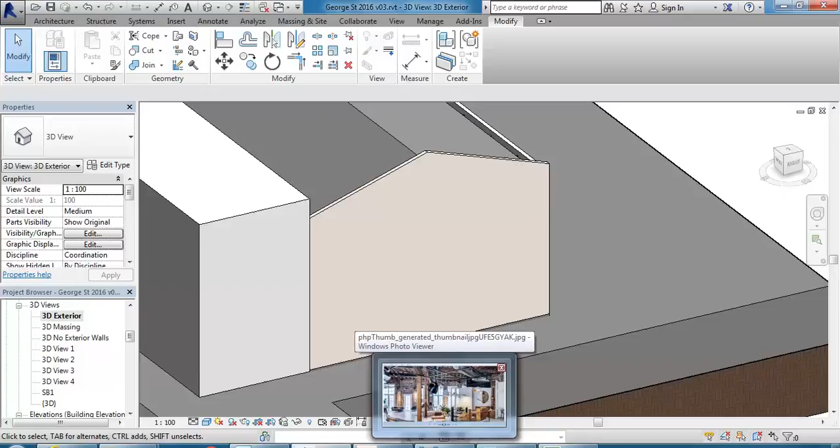So we're going to have a look at the facade, and it'd be a good way of checking the heights because I've done a bit of working out now based on the counting of bricks. So I'll just show you the method I used. I'm not going to give you all the numbers I've worked out because you should definitely sit down and work these out, and probably also go and do a site visit to take some of your own measurements. But just to show you the basic approach I've used.

I worked out that on this facade, just using street view, you should fairly easily be able to count the bricks at different points along that elevation. And then projecting around the front from there, you can see here that the line at the top of that wall... oops, I've gone a bit too close there.

Oops. Oh, it's gone and picked up one of those automatic photos, that's really annoying. So I just want to get off that.

Okay, so there we are. So again, projecting around from the top of that wall to the facade, you can see that the line there continues across to our building. And so by counting the bricks, you can easily work out the height to the wall moulding there, I suppose it is. Should know the name of that, but I can't think of it.

And then you can also double check and count bricks along the column there to maybe get an idea. That should be pretty close to the floor level on level 1 there. And again, you can double check to count bricks to the top there. And then also you can count bricks here from this line, which you've hopefully projected around from the side to get to the bottom there. And you can then scale to get the height from the cornice up to the top of the parapet.

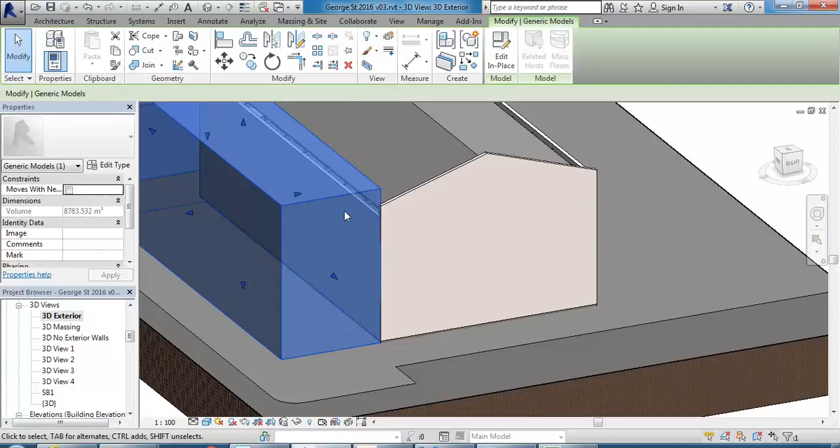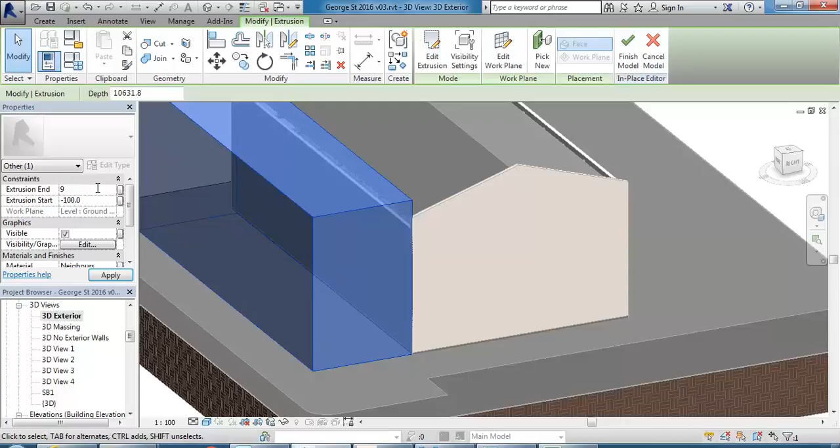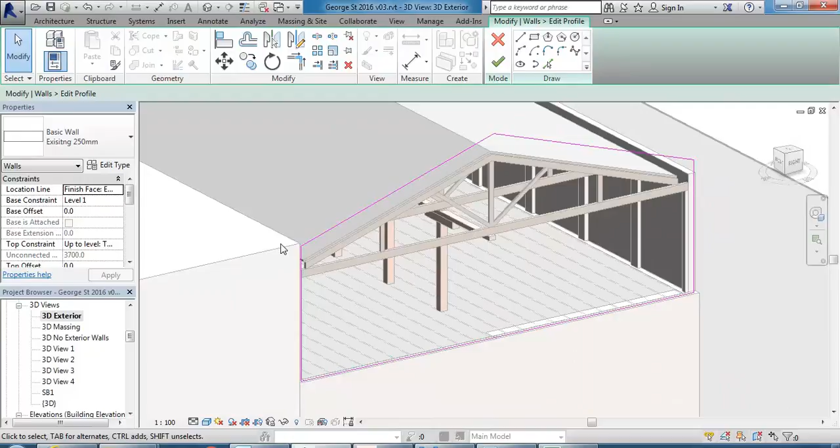Okay, so then to change the facade there, that facade wall, it's fairly easy to just select it again, go to Edit Profile, and you can draw a straight line coming across. So, yeah, that should be about right.

So I'm going to draw a line here, which should be able to snap to the corner of that neighbouring building. It won't be on the corner when it snaps to it because the plane that I'm drawing in is behind that corner. So you should expect that, and that's actually a helpful thing to be able to snap to the front there, but have it project onto the plane that I'm drawing on.

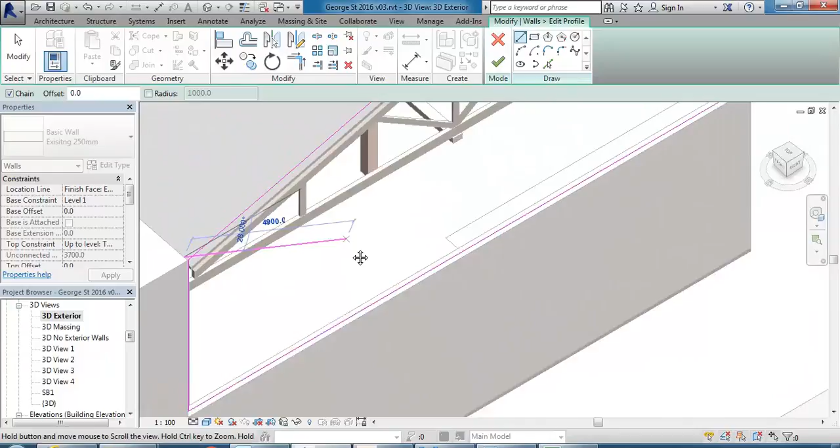So if you're not sure what I mean there, you can see from the side, the plane I'm drawing in on is the pink lines, and they are just behind that corner there. So it's projected back onto the plane that I want, which is exactly what I need.

And so then I can come across to the right and then use trim to join those lines together. And so then we can see that the stepping here is a little bit more, well, a little bit less than what I've drawn.

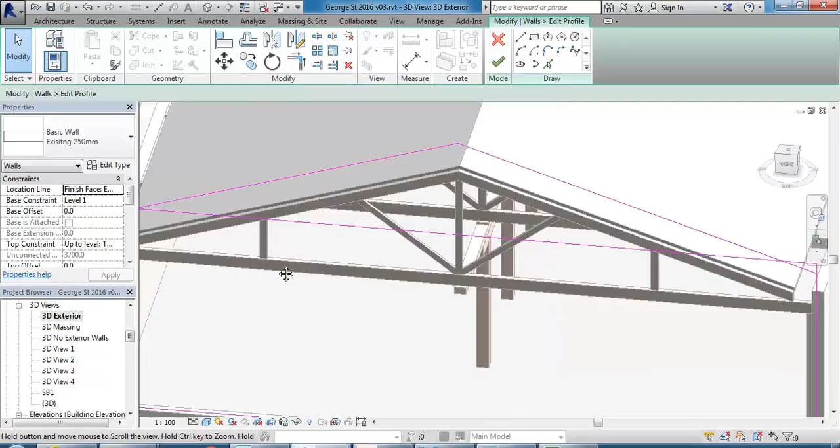Oh, so let's start it up again. So if I maybe just leave that angled for now. I could select those two lines and then maybe just for now do something like use the arrow keys to move that down to see how that could work potentially with the roof that's behind, because it does obviously need to conceal that roof.

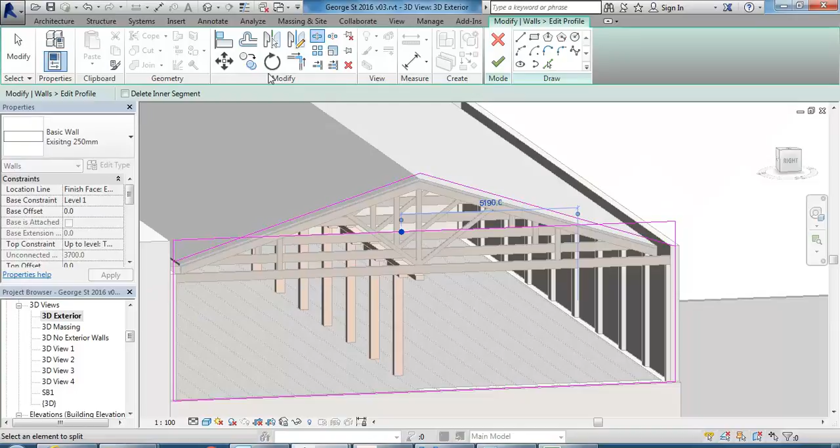And then I'll come back and modify this further once I've done a few other things on the facade. That's just to remind you how you can modify the profile of the wall at any time.

You could think about locking or associating that angled line with the roof. In this case though, we know it's not going to be an angle in the end anyway, it's going to be stepping, so it's probably overkill to go that far because it's all going to change in any case.

Before I can work that parapet out properly, I need to put in the other elements in the facade. So we've got a few important things: we've got those columns or piers, and then we've got the moulding that follows those, and then the windows and doors.

Going back into the plan view, the AutoCAD file doesn't show us where the columns are, and so we'll need to work that out.

Fairly straightforward though. I've got the wall tool here. Actually I'm just going to select the walls that I've already done and fix those first, because you'll see if I select the walls that the one on the side is going all the way to the corner and the one on the facade isn't.

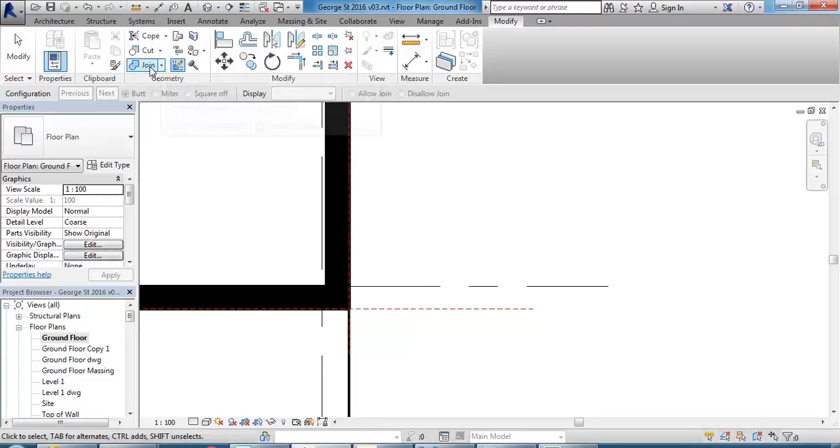So on the modify tab, hopefully you're getting used to using that one. Wall joins, next to join, and I'm going to click onto the corner there and use the next option, which is hard to see in this view because it's got the coarse display set to grey, so I'll go to a different view where hopefully I can see, again using the wall joins tool.

I already know because I've selected, but just to show you again, if I select that now, then when I choose next, you can see it's a bit tricky because there is a line right underneath the line I'm looking at, but hopefully you can see that line switching from here to here.

So we've looked at this already, but I just want to go over this again. This wall, again we've got the same issue, and again using the next option should make it go through to the end, and this one now stops at that line.

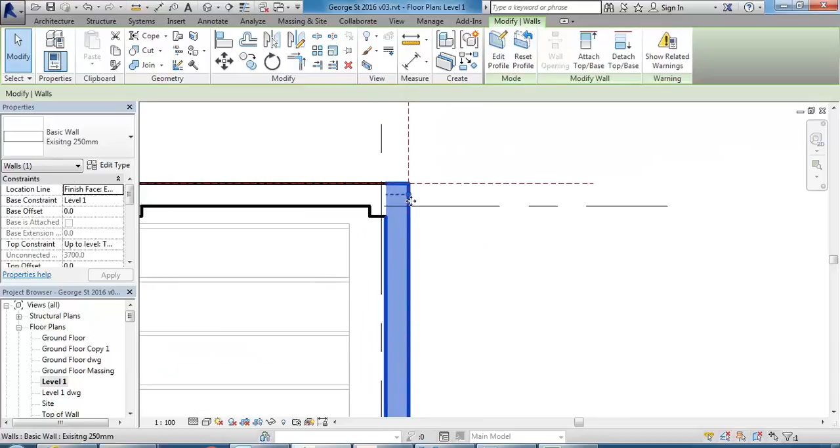On level 1, it's even more important, but this is the one I showed you before, so that's done already. There you can see that wall continues all the way to the front, and there again.

So the reason I've checked that on the ground floor now is because when I do the next set of walls, or the piers, I want to make sure they join correctly. So back to ground floor, I'll go to the one with the drawing file showing, just to make it a little bit easier.

And then having a look at these images, these are things you'll get used to in no time at all. When you see this with 1.5 bricks, then you know that it's 230 for a single brick, and then of course 110 going the other way, plus 10 mil of mortar, so 450.

Is that right? Sorry, did I say 450? Sorry, is that right? 230... yes, 450, that's right, isn't it? I'm not going mad. Yep, 450, and then that should be the same on all of these.

Okay, so again the projection. Just looking back at that image, how far do you think it projects from the wall? If it's half a brick, you can assume usually it's half a brick that it's coming out. So do you think it's 110?

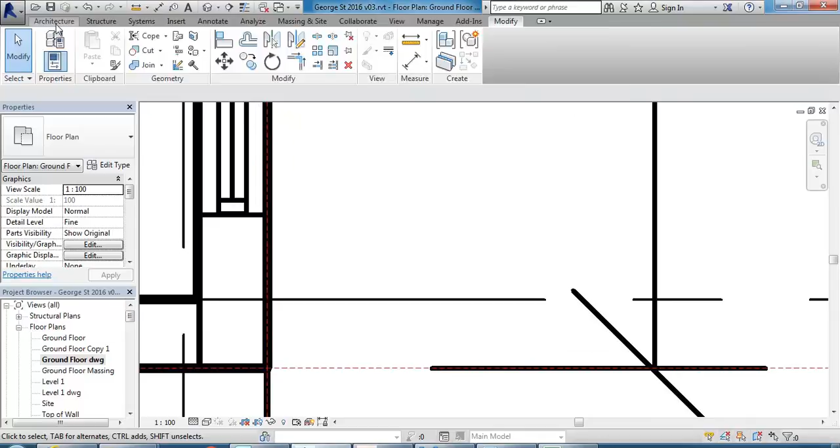Okay, so then with the wall tool, remember you've got the single brick wall type there, but that has face brickwork set as a material, and you probably don't want that. I've already made one that's existing 120, but make sure if you don't, that you make one that is going to be simpler than the face brick.

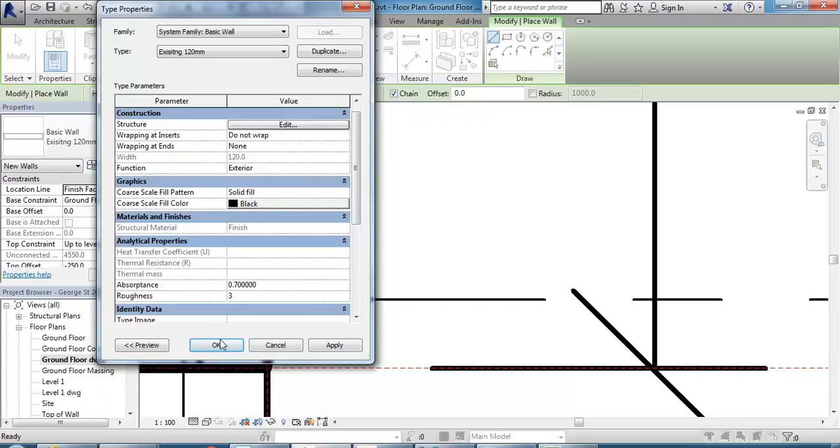It should be 120 anyway. And then also you want the material to be nice and simple. We don't want face brickwork to show here, and we don't want the brickwork to show in plan either. So with finish face interior as my location line, I'll set the height to go from ground floor all the way up to top of wall, I think.

And then going from this corner here, if necessary, you need to press space to flip it, and then we know it's 450.

Yeah, sorry, 350, not 450, you're right. So 350, we can just type in and then press enter.

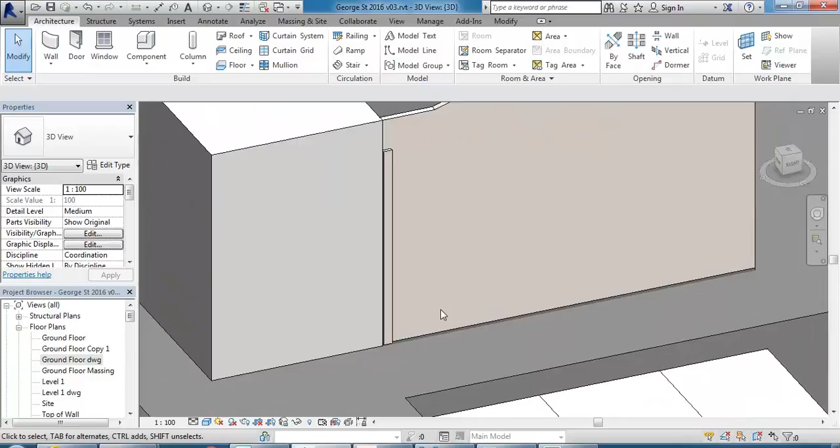Okay, so looking at the wall there, while I'm at it, I can fix this one and the one next to it, and just make the base offset minus 100.

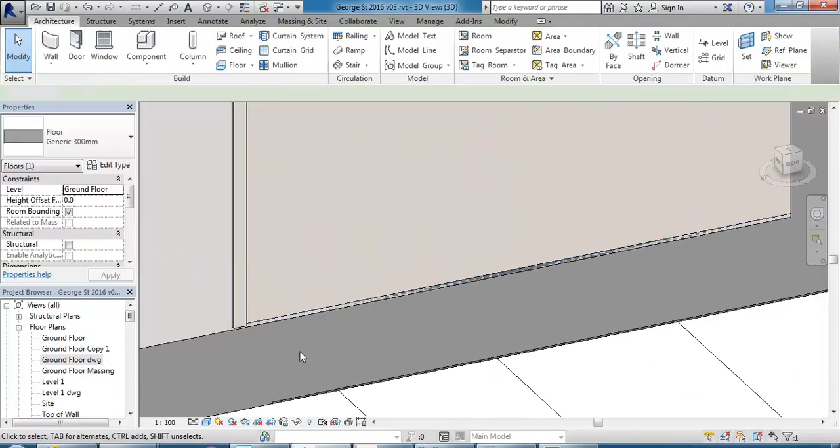For those to bring them down to street level. The floor I'll need to adjust as well, but actually if you have a look at it here, it's a bit of a funny facade, because there is a step here that's hard to see, and also a little one there.

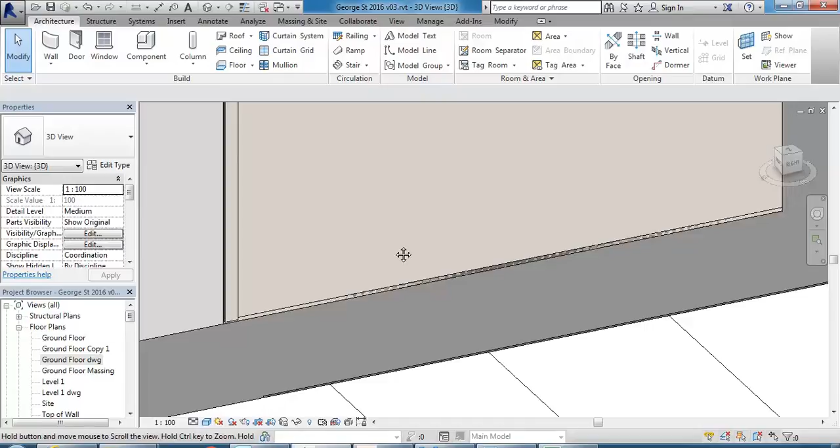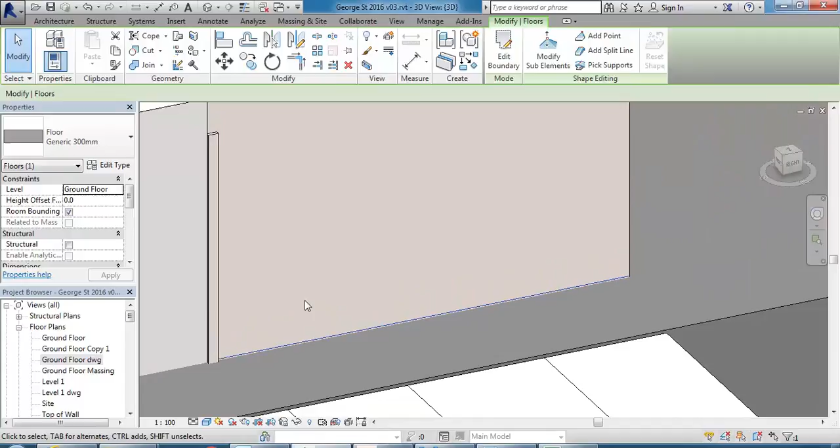Now, there's no reason I still can't have these walls going down minus 100, that's okay. They're just going down into the ground, I think that's a good thing. So then the base offset for this pier, again I can make that minus 100 to join up with the other walls. And then this floor edge that's coming through the wall, in the end that'll be refined once I do the opening. So you don't need to worry about that, but you should be thinking about it.

And then going to the next pier, again looking at the image there, that should be basically centered. And this is where I think the drawing could be wrong. I'd say it probably is, because that pier would most likely be centered in the middle of the two properties, or what there were two properties at one point, I think.

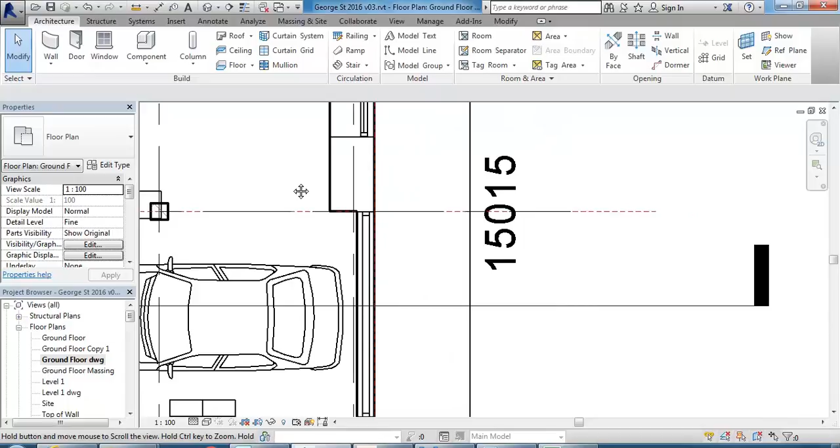So in the middle of those two different sides of the building, that should be pretty well centered, and they've got this opening here lining up with the centre line, which I think is probably wrong. So it's a good opportunity here to fix that.

So I'm going to select this pier and then copy that using the midpoint at the back, and then just snap that onto centre line here, and that should give you then a good reference to use when you put the opening in.

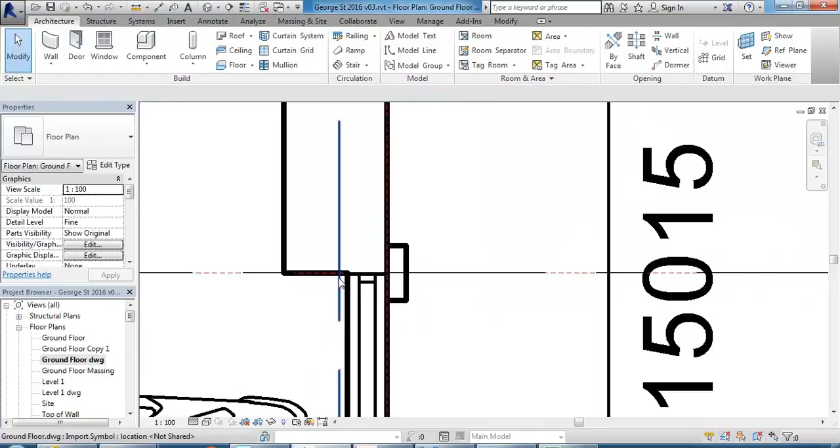Luckily we haven't done the opening yet, and it may be the case that this wall here extends. I might leave it like that for now, but it might extend down to the end of that pier.

And so then looking at the facade again, you've got a pier here that lines up with the parapet. So it's really important to get that as accurately as you can.

So 1, 2, 3, 4, 5, 6, 7, 8, 9, 10, 11, 13, 14, let's say 15 bricks across. So 15 times 240 - it's got 230 plus the mortar, so 3600.

Okay, so I'm just going to copy this, 3600 plus 350, so 3950. And there we go, that's turned out pretty well.

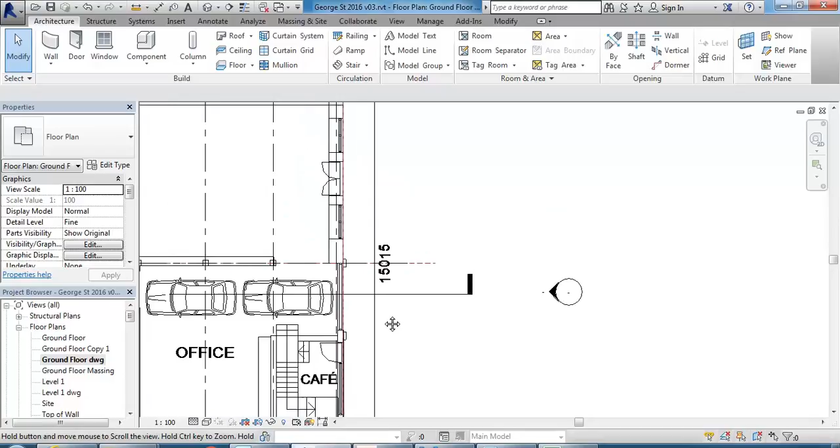And let's have a look at that. It may be, no, they're not quite even, are they, those two bays? Yeah, one's definitely bigger than the other. So that's probably the best we can do. But I mean, I don't think it's a coincidence that it lines up with the stairs there. So that looks pretty good.

And then going back to the facade now, it's a good opportunity to go over some of the modelling tools. And so you can see that the wall actually goes up to the parapet.

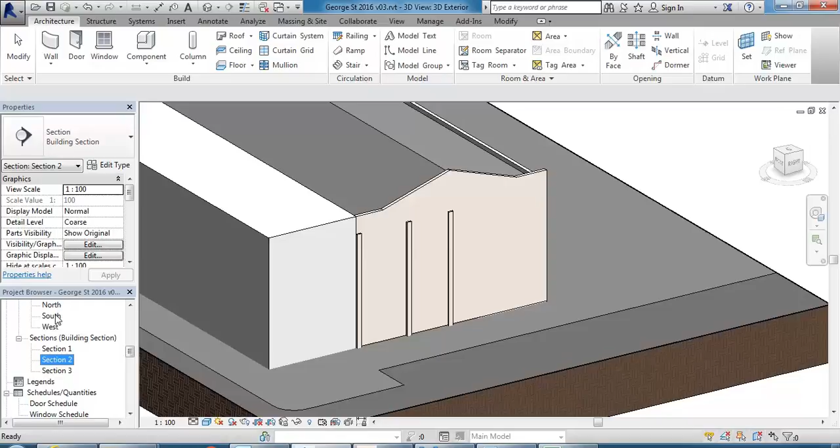So I might even make a level for that. I think it's worthwhile. So this in the east elevation can easily just be made by copying one of the levels. You don't need to use the level tool every time if you want to make a new level. It's actually a good shortcut.

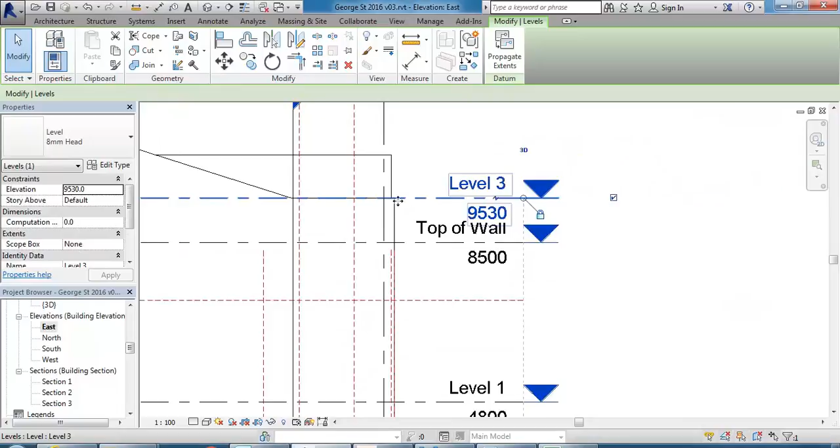To copy a level. I'm going to move that new level to the top of my parapet. Call it parapet. Oops, caps lock off.

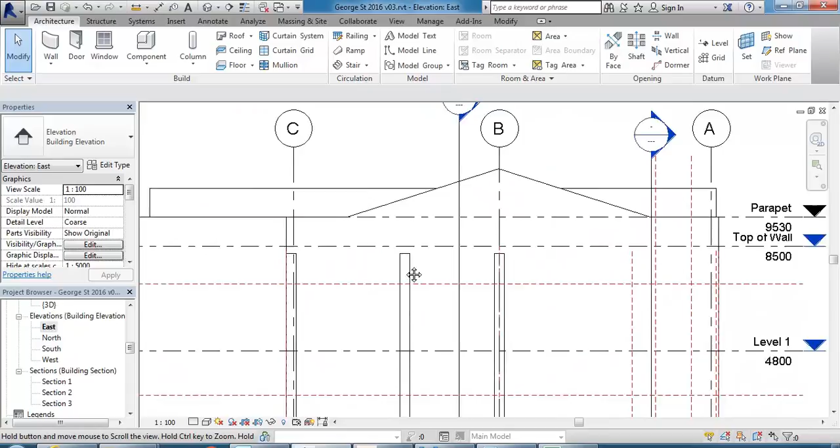And notice that it's got a black arrow, and that tells you that there's no plan associated with it, and I don't need one. So looking in the project browser here, there's no floor plan called parapet. You can easily make one later if you want to, but again, I don't need one.

So what I can do though is select those walls that I've created and then set their top constraint to that parapet level. And then looking at the heights there, they do finish a little bit below. So it's probably 2 brick courses down, I'd say.

So what's that, 170 roughly? I'm going to make sure that base, the top offset there is minus 170, maybe minus 180, actually it's probably a bit more than that.

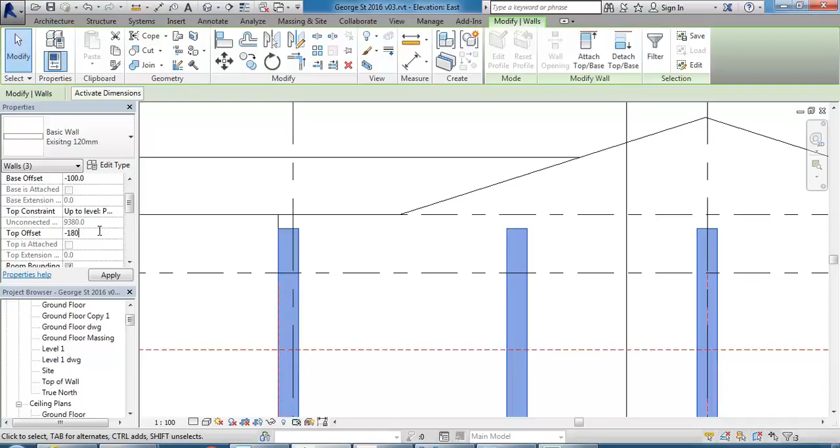And then I can start modelling the top there. Now I'm just going to get the other, there's one more pier, so using mirror, pick axis, I can pick my grid line. And what's the problem there?

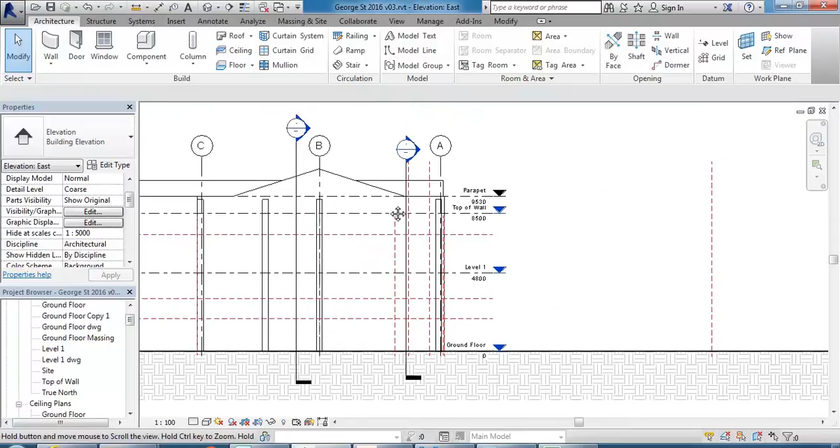Okay, so we've got an issue there with my set out, because I've gone from the centre of the wall. So I'm just going to dimension these.

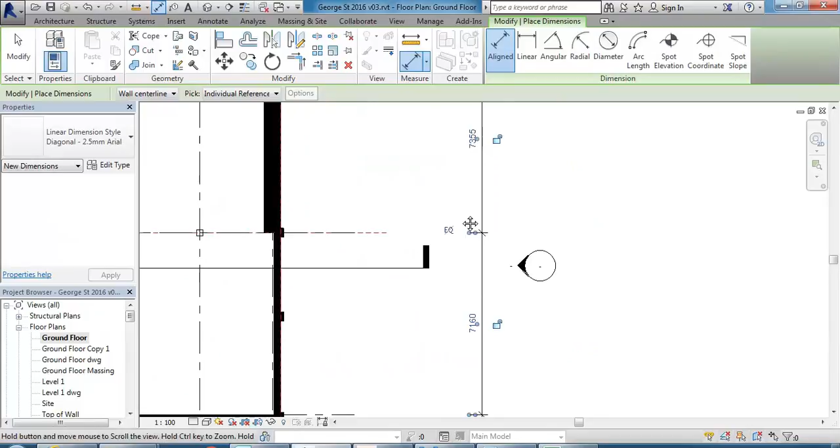So this has all come from the AutoCAD drawing, which might be accurate, but based on what I've seen so far, I'd say it probably isn't. So I'm going to make an executive decision there and just centre that grid line.

I don't know, has anyone worked out whether they are equal or not, the two sides? They probably are, because the roof structure you'd think would be symmetrical, and the columns would sit underneath the centre of that. So they probably are symmetrical, and I'd say the AutoCAD drawing is the thing that's off.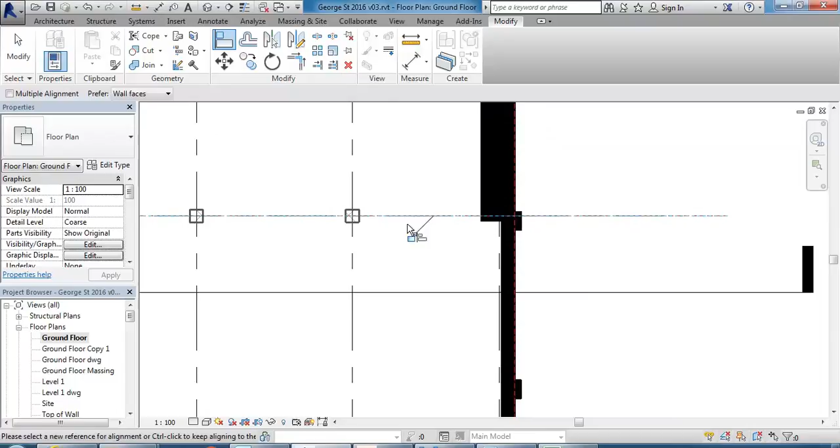Okay, so I'm moving everything across, and then that should mean that my pier as well should be even, but I'm just going to flip that over, also move that over manually.

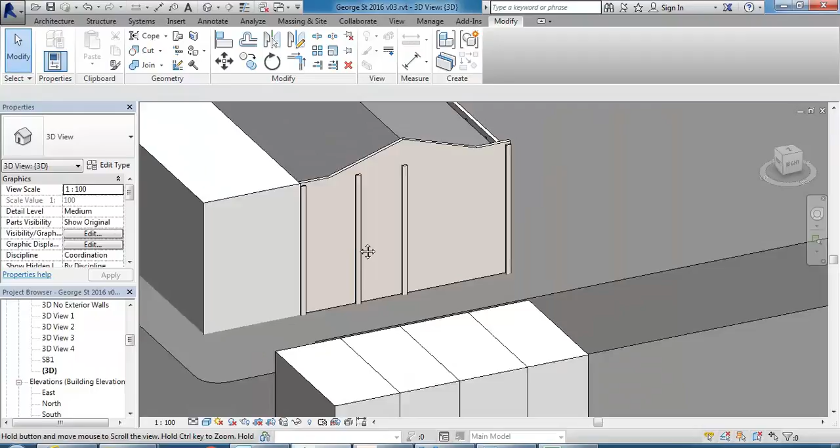And then I better check in plan that the pier here is centered as well. And you know, a lot of things in Revit you can make parametric, in other words adjustable afterwards.

But here I'm going to do quite a bit of modelling, and I want to make sure that's as close as possible to being right. So it's a good chance here, especially if you haven't done any solid modelling for a little while, to look at the solid modelling options.

And you can see firstly that these piers are not exactly on the corner. This is common when you have a facade like this, so it's set out probably by a brick course. I'll adjust that in a moment.

And then on the other side, I think it's the same. Yeah, so that gives you room for things like downpipes as well.

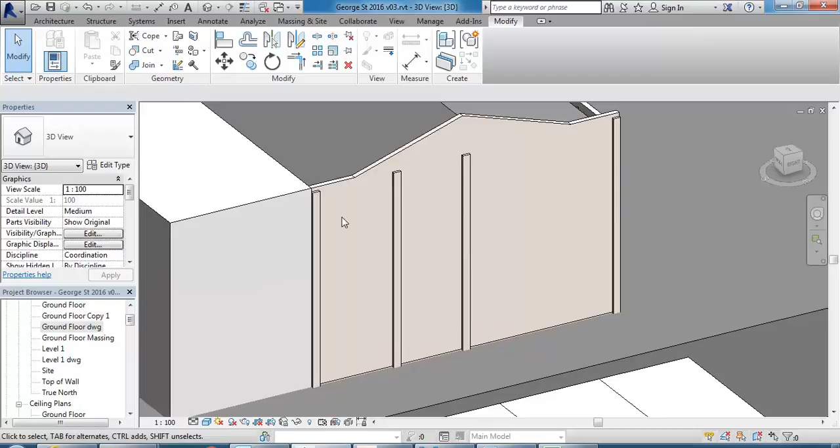So back into plan, that should be easy to adjust. Remember, I measured this one from there, so I'm going to move them both together. Again, 120, and then moving this one, again 120.

Again, you just want to think about that setup, because the modelling that's done from that point onwards is going to follow these shapes.

Okay, so we've got this stepped cornice, really is what it is, even though it's not on the interior. It's still, we'd probably call it a cornice. So you can see there hopefully a better view of it.

And just try and get the view from the street.

Okay, so you can probably work out with the brick courses there as a reference, it's about 4 brick courses high, between 3 and 4, closer to 4. So it's obviously too early for me to be doing maths, so 4 by 86, yeah, it's 350, 340.

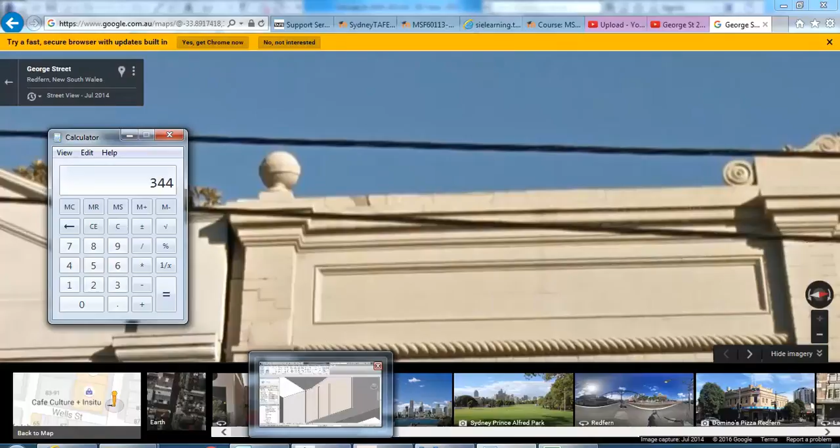So in the, well, any view we can go to model in place. I'll just show you, there is the option to use this tool called wall sweep, which often works really well for things like this.

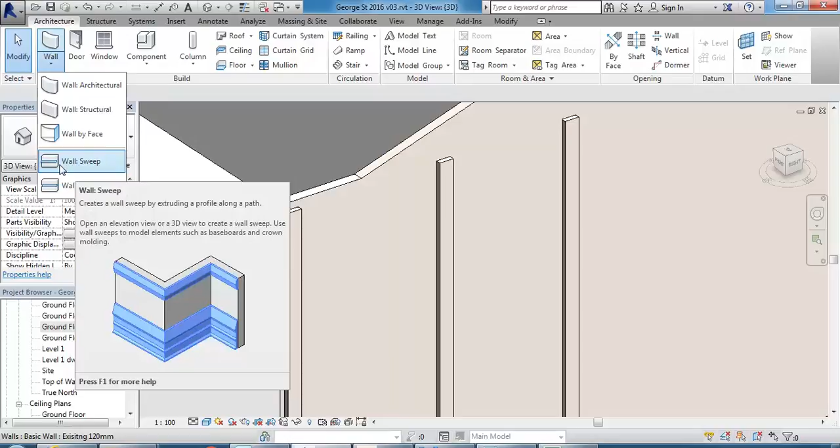But because we've got to go around several walls, it would be a bit tricky to make that work. And wall sweeps can be a bit problematic as well, because they have issues if you do them on both sides of a wall, and there are other issues. They're good when they work, but they don't always.

So you always have the option of using model in place and setting the category to walls. And so I'll call this exterior moulding.

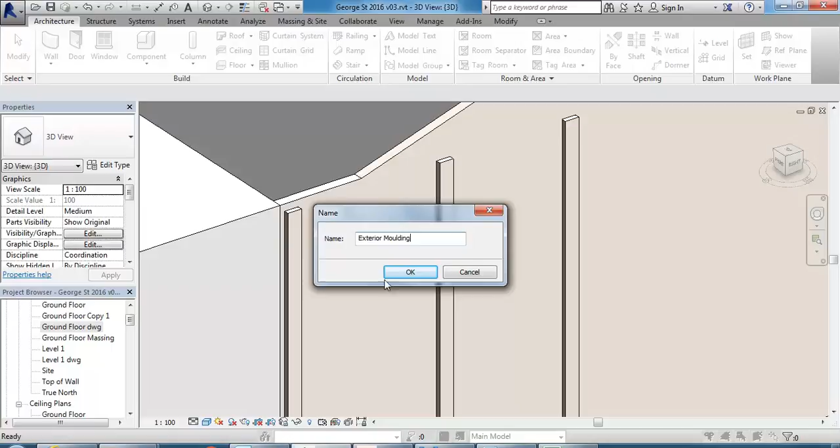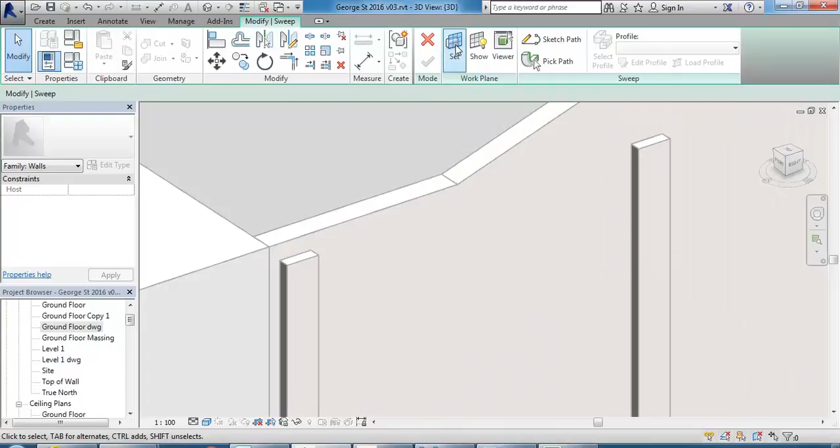And so the first step would be to draw, well, we're going to make a sweep, and then create a path. Now, you could do the path anywhere, but again, just to make life a little bit easier, you can use the set option and then pick a plane, and choose something like the top of one of those walls, so that you can see the path following those shapes.

So here I can use pick lines and actually pick, oops, so I'll go back there because I had an option on that would have made it a bit tricky. I had the lock option still turned on there. That can be handy if you think the walls need to change, then it might be handy, but I think sometimes that will get in the way. So I'm going to make sure the lock's turned off there, and now I can pick these lines.

And I could pick this edge, but probably there it's easier just to draw one now coming across, and then continue picking lines.

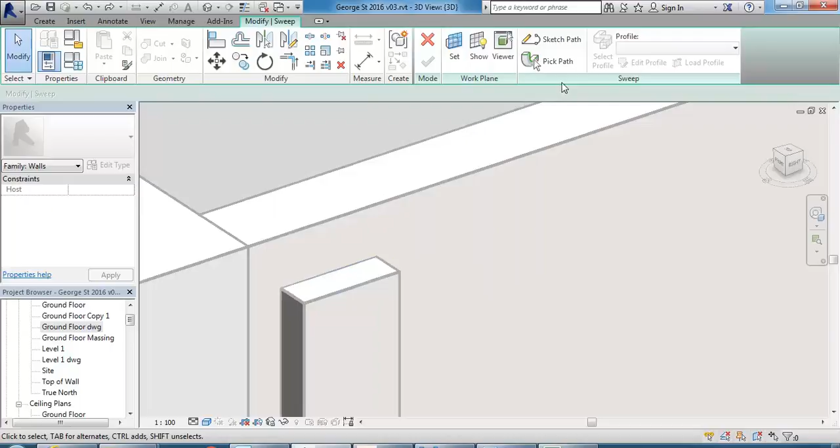Oh, now that was stupid of me, sorry, I've gone too far there. I started drawing my lines instinctively when I should have gone to sketch path. So I'll just check that again, and make sure it's got the plane still selected, and you can always use the show option there to check it as well.

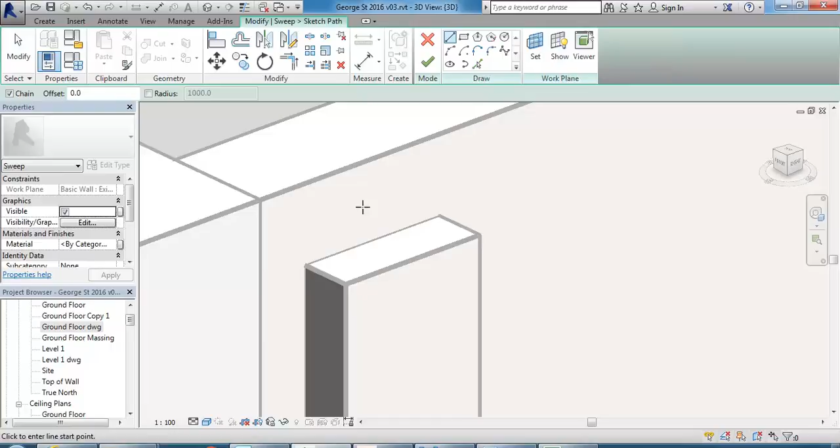A bit hard to see, but hopefully you can see that when I toggle it on and off, it's showing me the grid on top of that wall. Sketch path is the option you need to choose before drawing your lines. So I'll just use pick lines now. There we go, that's better.

I'm used to doing massing where they're not as clear. So here we go, if I choose these endpoints here, I could probably just continue chasing it around. Sometimes though pick lines is going to make it a bit quicker. Yeah, I might use pick lines there.

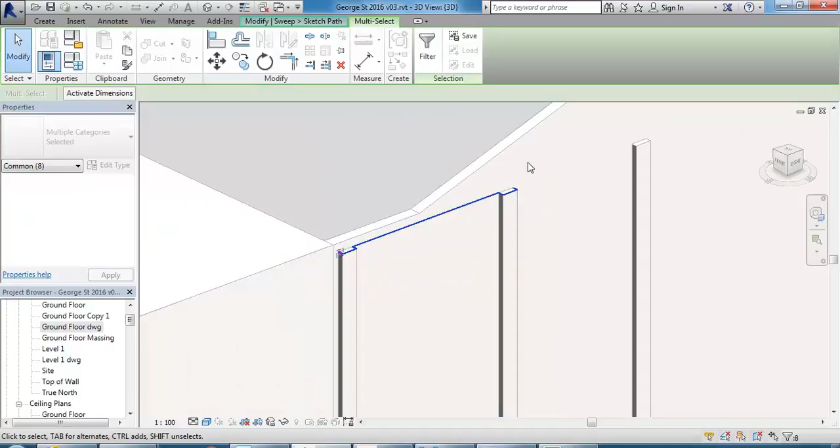It can be handy to use shortcuts like SE, snap to endpoint here, and again, where possible, use pick lines.

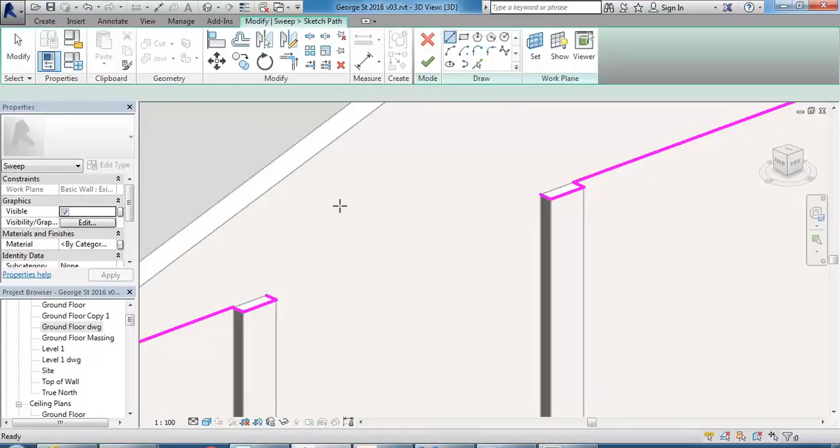Okay, so there I've obviously missed a point. I think it was this line here that was the problem, so I'm going to just draw that again. Still missing one, so just have to go and find the gap. Ah, there it is. So that line.

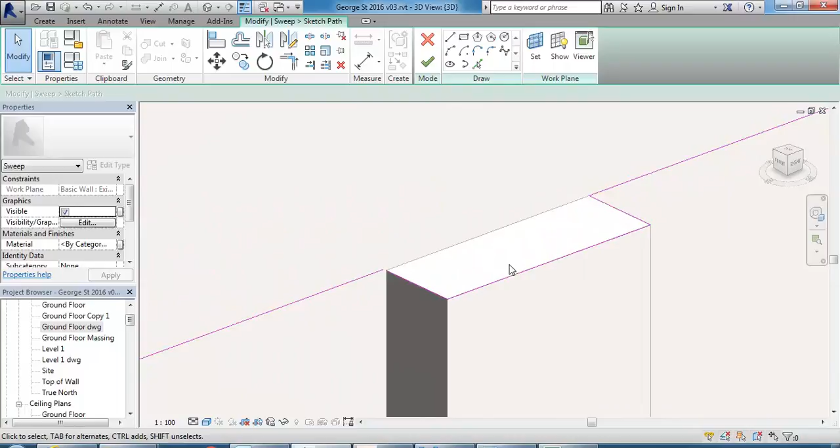I think one of the computers got turned off. Did you lose it? Ah, sorry. Yeah, sure.

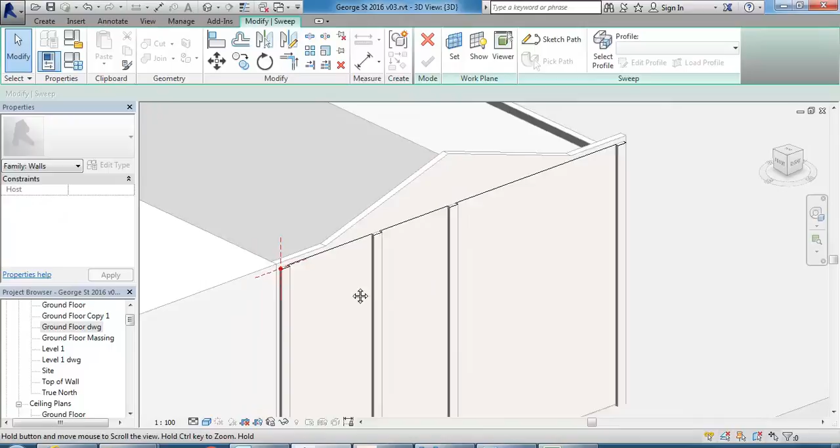Right, so anyhow, when you're doing that path, that should be easier than I've made it look. But then the tricky part will be doing the profile. If you don't see the edit profile button, you just click select profile to bring that up again. Then when you choose edit profile, it'll start drawing on the gizmo, the plane icon, which is usually in the first segment you've drawn for your path.

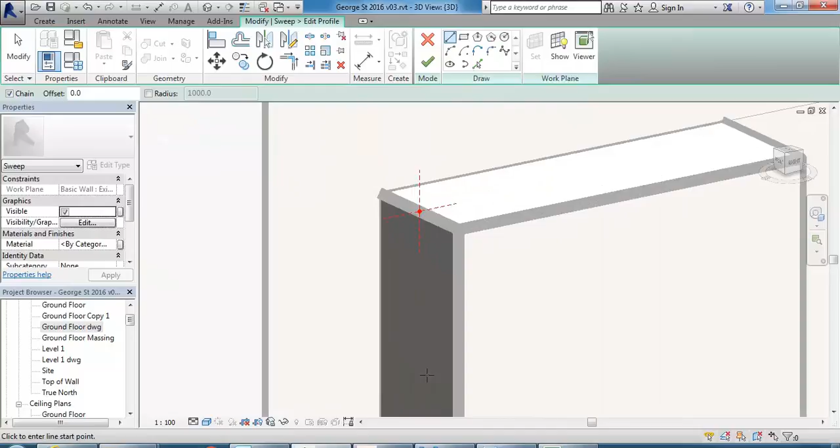So now I can go to edit profile, and again it draws it on this starting point. I'm going to come down, what did I say, 350 roughly, or probably closer to 340. And then just by eye, try and get something like we've got here. So we've got 1, 2, 3, 4, 5 pieces.

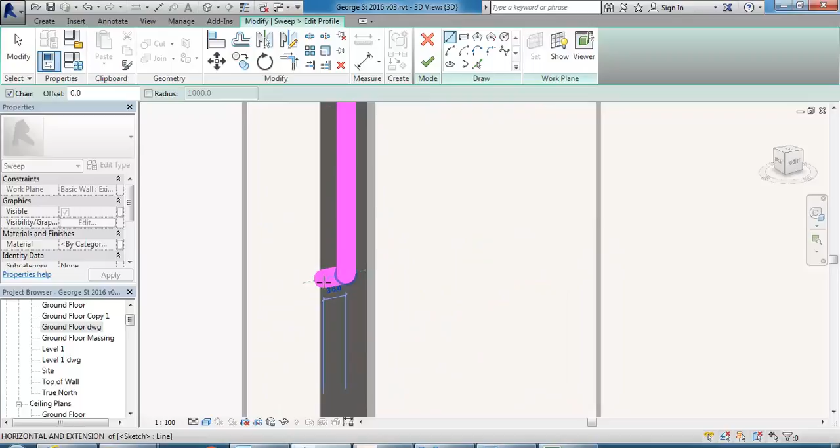So the first two are probably about 15 mil. We're going to come across maybe 20 actually, and then come up 15. It's a bit hard to see now what I'm doing, so I'm going to turn thin lines on. Then continuing from there, the next is a bit bigger.

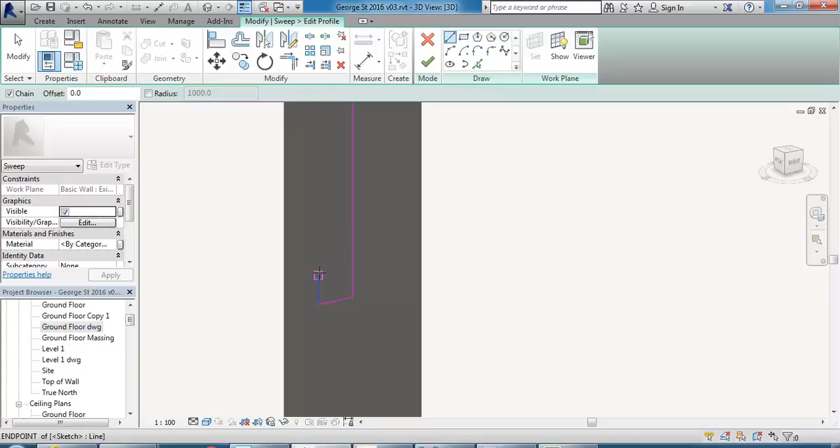So we'll say across 30 mil, and then up, I don't know, 25. Okay, maybe that visually doesn't look right, so I can always bring that distance back to 20 something. That looks better.

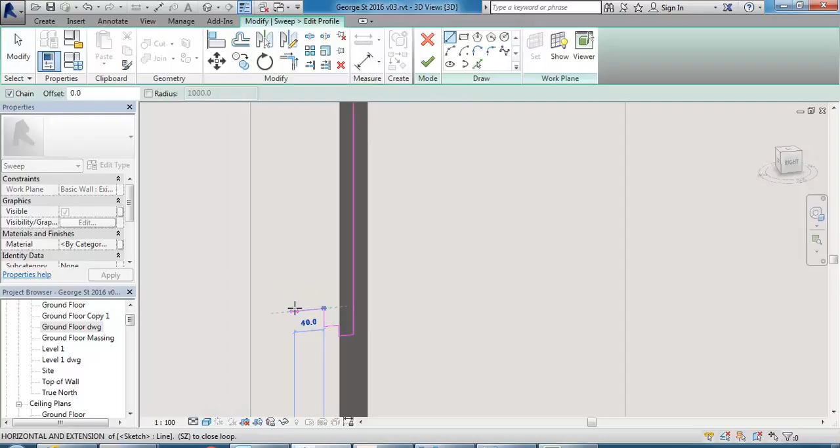And then it seems to come out about the same distance again, and then go up much higher. So again, just with the line tool, across, let's say 20, and then up about 40 or 50. I don't know, maybe even more, maybe 80.

And then stepping out much further, let's say 40 or 50, and then up about the same distance as the last one. So across, yeah, let's say 40, I know, no, maybe 50, and then up, let's say 100.

And then stepping out a reasonable amount again, not quite as much as the last one, maybe just 30 or 40, and then up to the top and the back. So I can see there, it's close, but to finish that off, I had more room than I should have, so I can always come back and adjust these lines fairly easily. So this comes, maybe come up, and this one maybe come out a bit more.

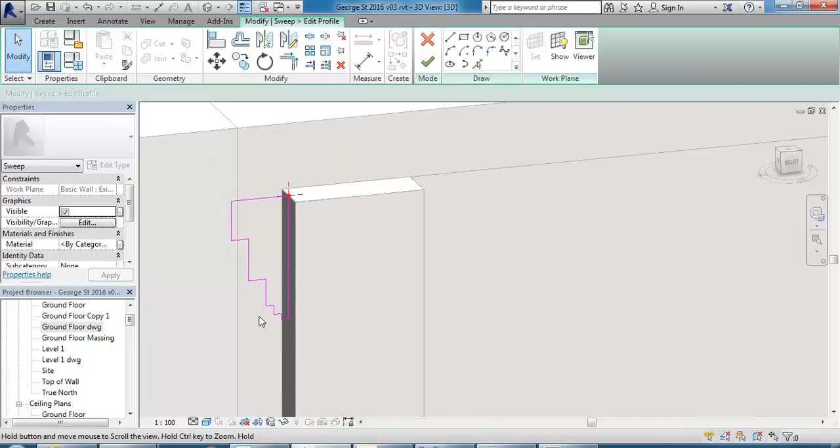So it doesn't need to be perfect, as long as it visually reads similar to what's there. That might be close enough. Maybe this can even come up more. Tick to finish, and that will finish the profile. Tick to finish again, and that will create the finished moulding.

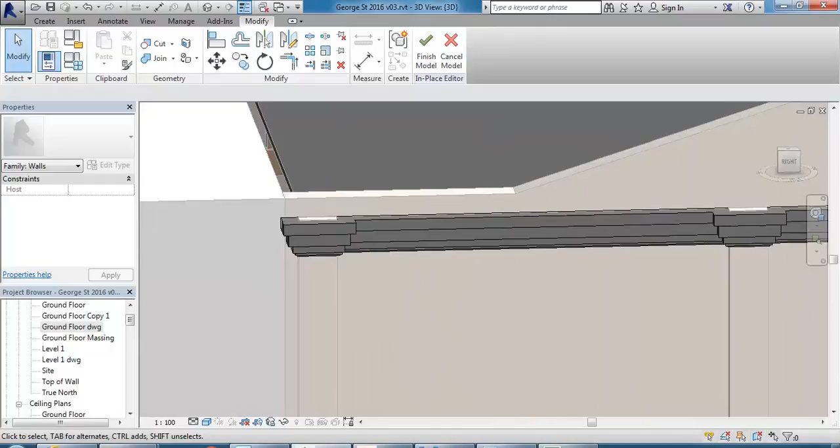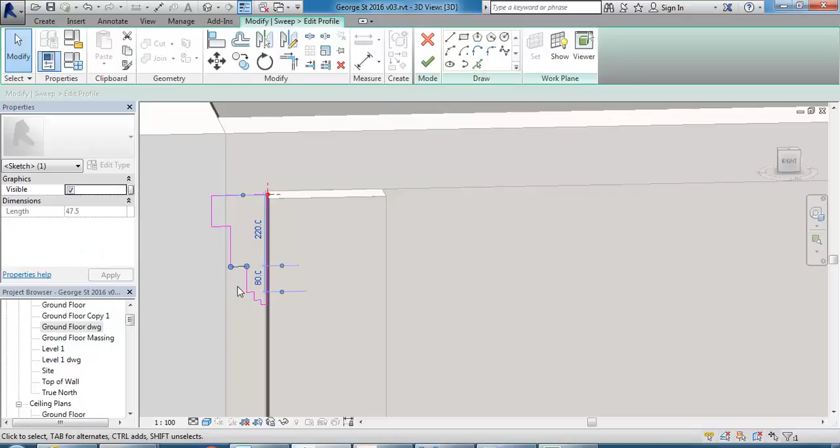Okay, so I'd probably still go back and refine that. It's worth getting it maybe a bit closer than that. So I think the top there is well, not high enough, or the bottom needs to come up more. So I'm going to go back again to select profile and now edit profile, and I can keep modifying that shape so that looks more like it. So it's often just a matter of incremental refinement.

That looks better. Don't forget to set a material. If I select that now, I can just set a material, same as anything else in properties. So I'm just going to use my finished material for now.

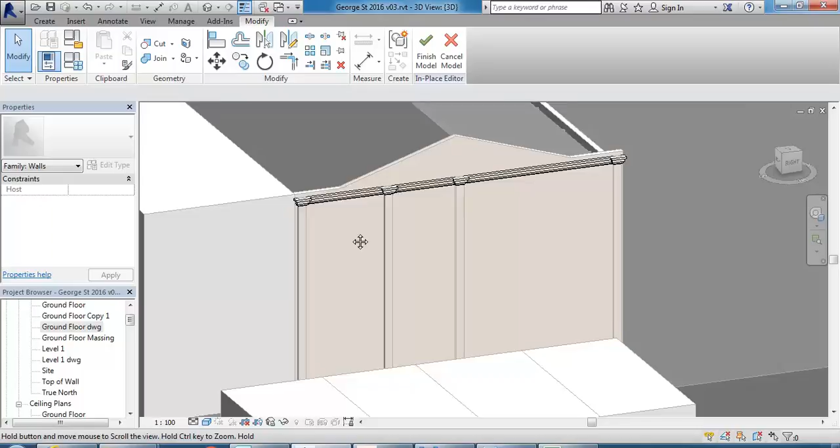Looking at the rest of the facade, we've got the same thing again. That's why it's worth getting it pretty close to being right before copying it. So to make that easier, I might go to my east elevation.

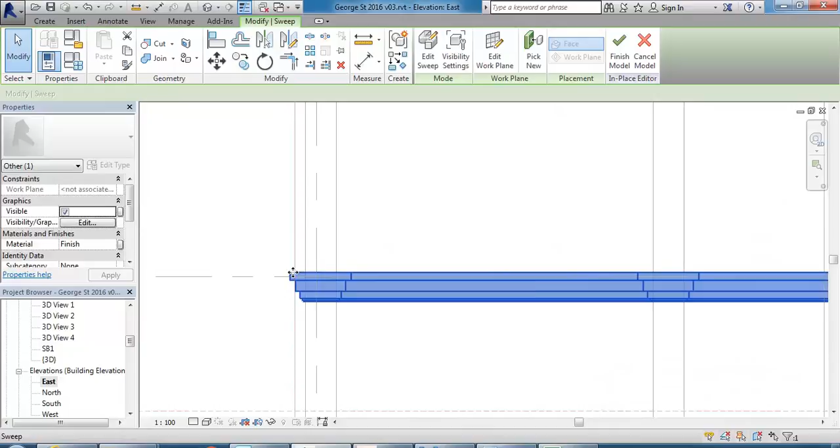There I can copy that down to level 1. Just making sure that's in a straight line. I might undo that and try that again. Copy, and then probably want to make sure it snaps to 90 degrees.

I won't show you how to do all the others, but you can use the same approach to do all of these. If you really want to do the scrolling, you can. There is a trick for that, but I wouldn't bother. I would just do a cylinder going across, and then you can do these again.

I've drawn Greek classical architectural details many times and labelled all of these, and it's just escaping me what the terminology is, but there are terms for all of these different elements. So you could model those as well.

A good trick there, rather than trying to do it recessed, is just to do a frame and have that flush with the facade and not worry about projecting that. It would cut into the render there a little bit, but maybe you don't have to worry about that.

Only once you've done all that moulding can you then start to work out the stepping on the parapet, and then continue doing the detail up there. It's a really interesting thing to try if you haven't done that level of detail before, because it teaches you about all of the classic architectural elements that a lot of these buildings have in common.

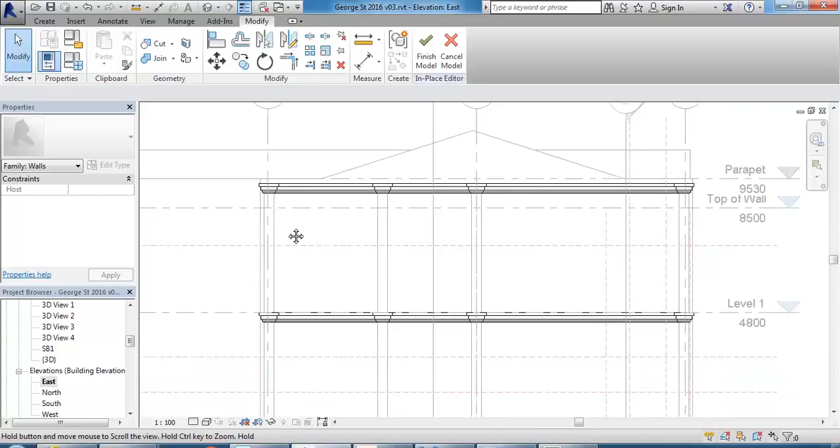And then again, just going back into here, once you have that, the other main element that determines the appearance of that facade is the pattern of the openings, or the fenestration. And so we've got the windows. That is really easy because I've given you the families for those.

I'll just quickly remind you, I'll go in place with the window tool, load family, and go to the folder for the project on the P drive. I've put a copy of these onto Moodle now, so you should be able to get these from anywhere, in the George Street Revit Families folder there.

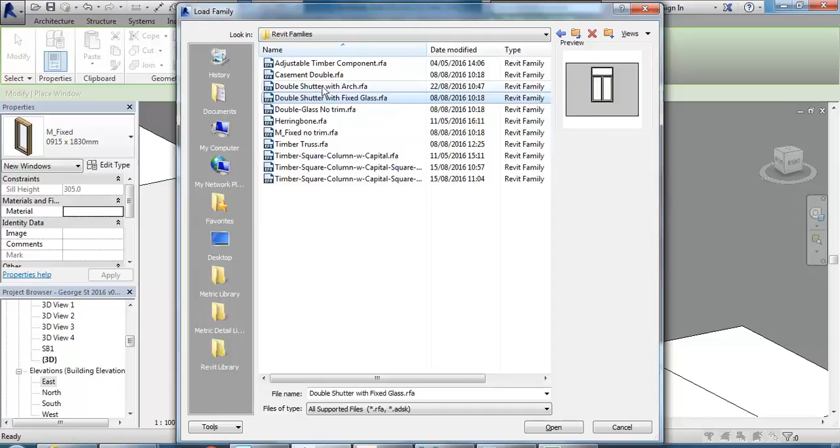The only one that isn't there is the one that I've made today, which is this double shutter with arch. I've just added that little curve at the top. And often when you're placing windows, you can just do them roughly to begin with, and then later on come back and fine tune the position.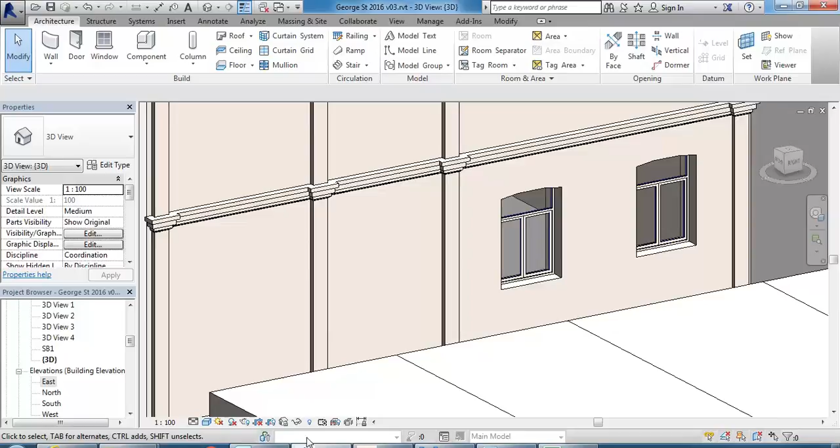And so then for the garage door, there's a family you'll find in the main Revit library for that. But then for the opening over here, do you need to keep these openings the same? I think that's probably the best one anyway. But I mean, I suppose you might do these differently if you're changing the design there.

Yeah. Right. Yeah, I mean, I wouldn't be surprised if they kept the openings the same. They might have replaced the garage door with something internally, but the actual openings are probably pretty similar.

So I'll just show you how to do this anyway. There you've got obviously a door and a window together. And in that situation, it's usually easier to put a curtain wall in for those. So to do that, what you can do is just put an opening into the wall.

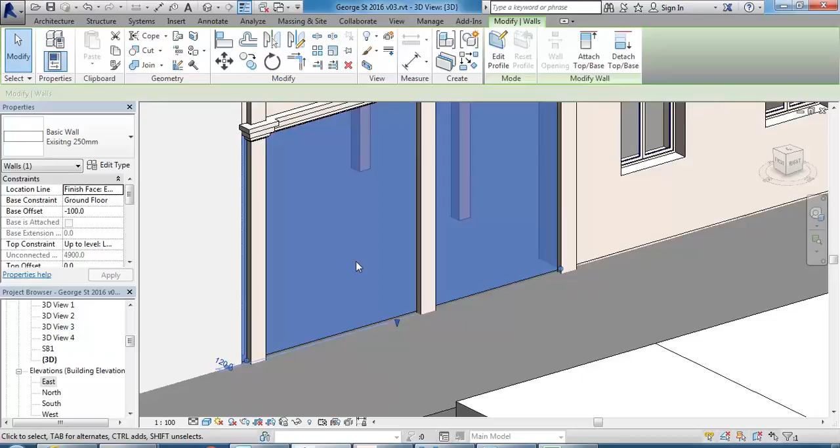There are a couple of options there. You can just use that edit profile option again that I've shown you already. Or make sure you know also that you've got the opening tool on the architecture tab. You can just choose in the openings panel the wall option, select the wall, and then just draw a rectangular shape.

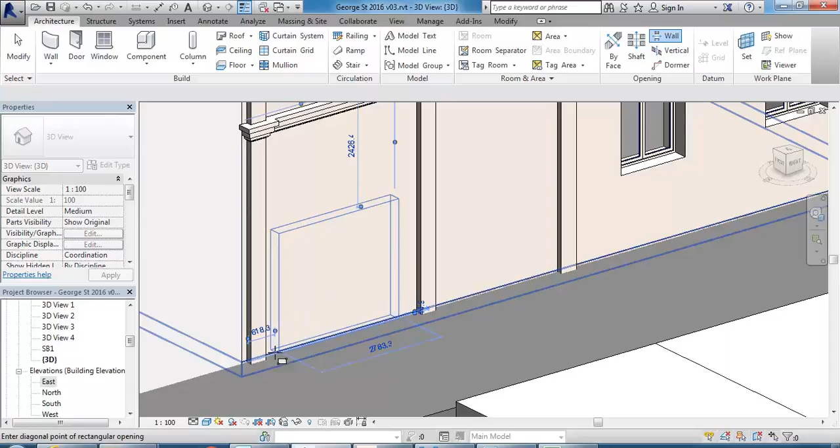So that can be a good option for putting quick openings in. They're a bit painful to adjust, honestly, but they work.

So it's got the base constraint on ground floor, and I can say base offset. Looking at it, we probably want that to go all the way to the bottom of the wall, so minus 100. The top constraint is on level 1, but I don't want to measure from level 1, I want to measure from the ground floor. So I'll make it ground floor and make the top offset 2100 or so. It's fairly low, that one. And yeah, that's right, that's from ground floor. So that's the key to it.

If you want to use a curtain wall, just make the opening first and then come back and draw in a curtain wall. You can also adjust the opening dimensions in plan, but again, it's a little bit fiddly.

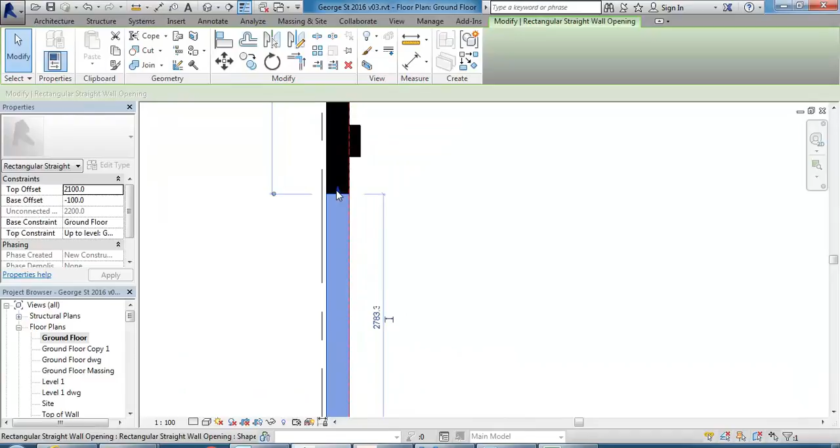So it can help you sometimes to put in a reference plane to help measure the exact dimension. I'm just going to eyeball it and say that's about 200 mil, and the other side is pretty similar. Let's say 200 both ends. That makes it easy.

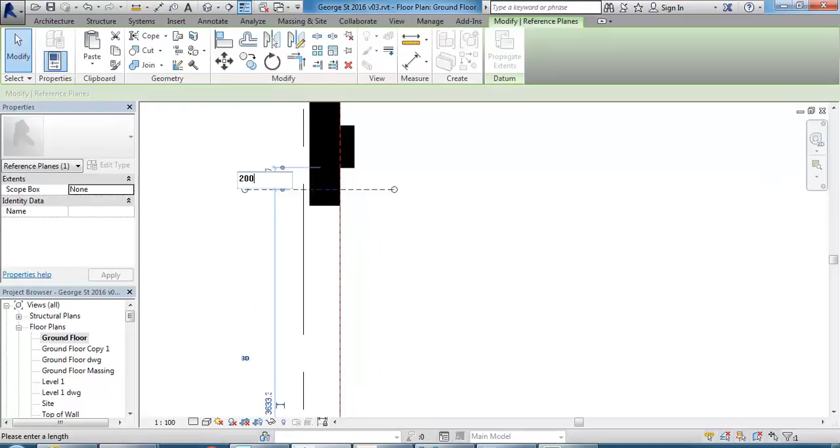And then I can easily stretch the opening to snap to the reference plane.

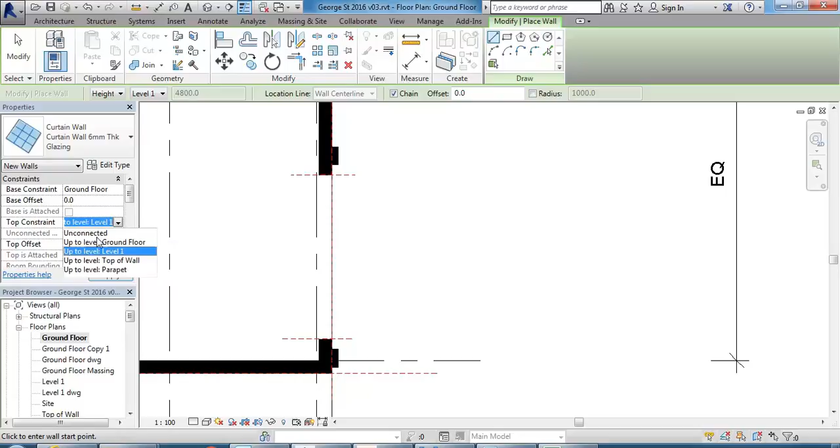And then now I can draw a new curtain wall inside that. The easiest option here is just to use the curtain wall 6mm thick glazing. I can set the height to unconnected and then just type in the height I know it is from the ground floor - it's 2100.

Making sure I draw along the centre line there, and then space if necessary to flip that in the right direction. So it's just a single sheet of glass.

And for an opening like this, it's easiest to then put in the grid manually, just using the curtain grid option there. I can place a grid line, 900, that should be about right.

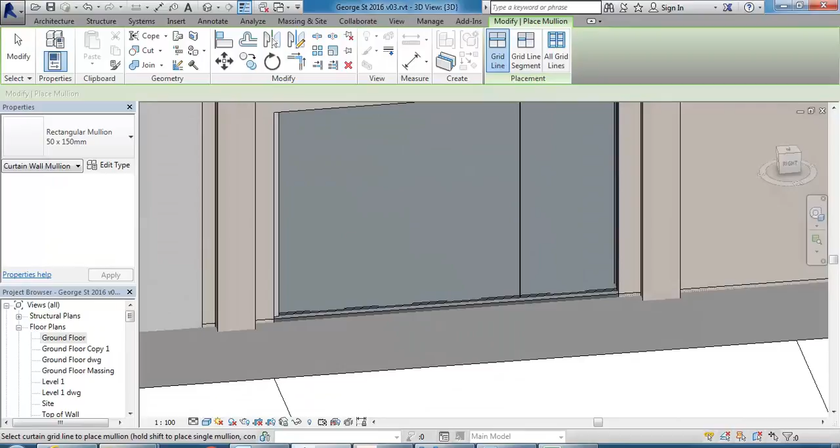And then I can go and manually place mullions onto the sides, and there's probably one on the top. The other side, the one at the bottom is a bit different, so I'll come back to that, but here at least I can do those sides and then the top. Let's try and get a better view there. There we are.

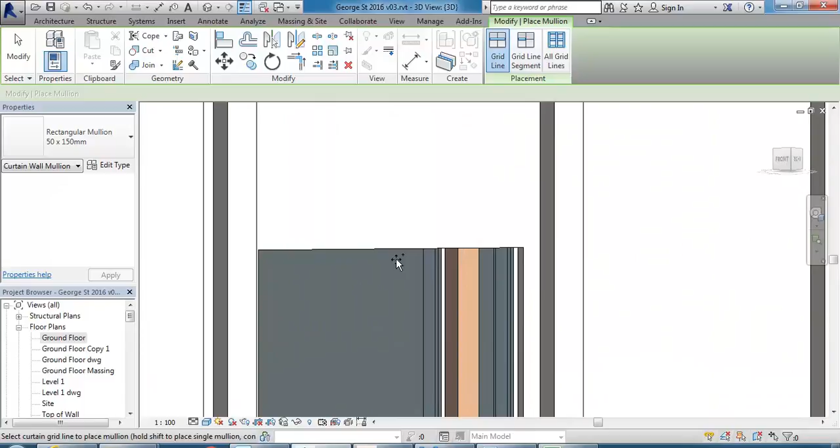And then remember, you can always place doors into a curtain wall using the curtain wall panels. I'm just going to press Tab to highlight the panel, edit type, and show you - this is the last thing - there's a bit of a bug. It's been in Revit since about 2014. When you first go to load in a new panel, this load button is greyed out, just because it's a system panel, and if you try changing it there to something else, it still won't help you.

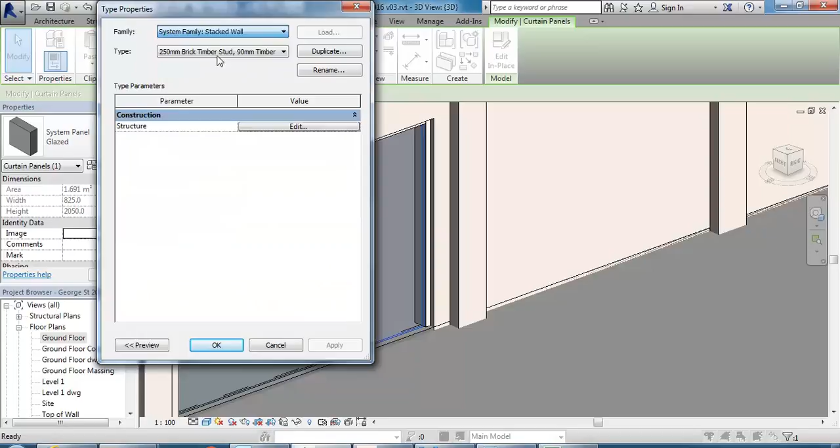So what I found is you need to just go and load in a panel. Go to the Insert tab and then Load Family, then go to Curtain Wall Panels, and choose any of these doors, doesn't matter which one - go for this one.

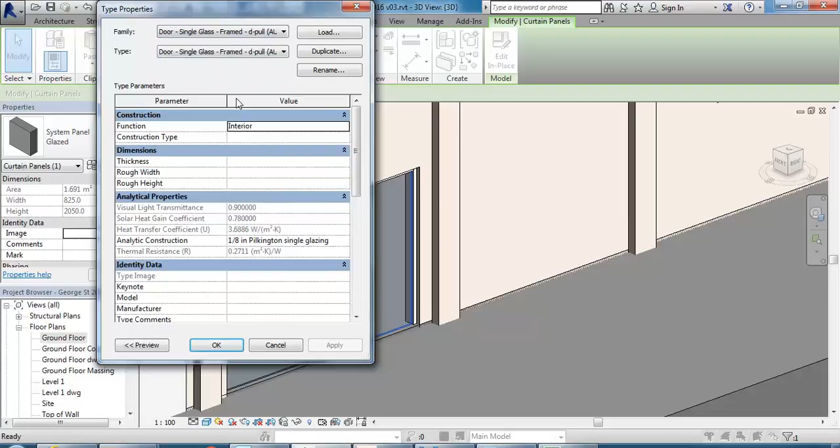Now, if I go back to that panel again, edit type, and the load button is working. It'll work from that point onwards, it's just the first time you go into it. So I could load in a different panel if I want, but remember I've already loaded the one I want. I can even just go here to the list and choose it from there. It's just one of those fiddly little things - once it's working, it's fine. And so there we are.

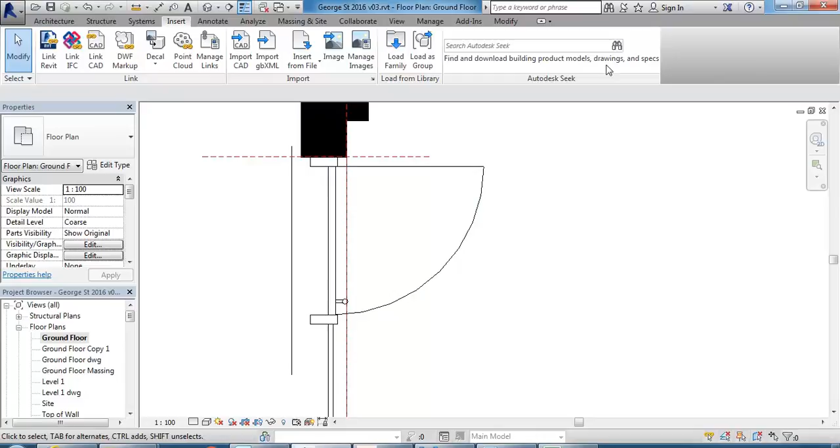Now I've got a door as part of my curtain wall, and that will show up in plan as well. I'll show you later how you can change it to a different kind of door, but I think this one's nicer than the one that's already there anyway - maybe not stylistically the same, but hopefully that'll give you the idea.

So you all know how to do doors, but maybe I'll let you try to work out how to do this door. And then the upper level windows, I've given you a family for those as well that is close - it's not perfect, but it's close enough for now.

And you could use a similar approach for the rear. So you've got some windows there, but if you want to do a big opening, you could use the opening tool and then put a curtain wall in there.

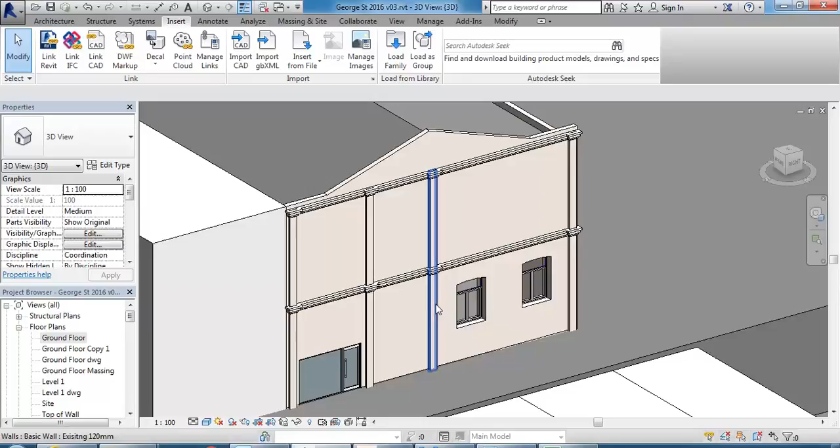Okay, so hopefully that'll give you enough to do the rest of the facade. And then we can come back to look at the interior, and I'll do something on areas for you as well. It might help with your master planning after you've had a break maybe.